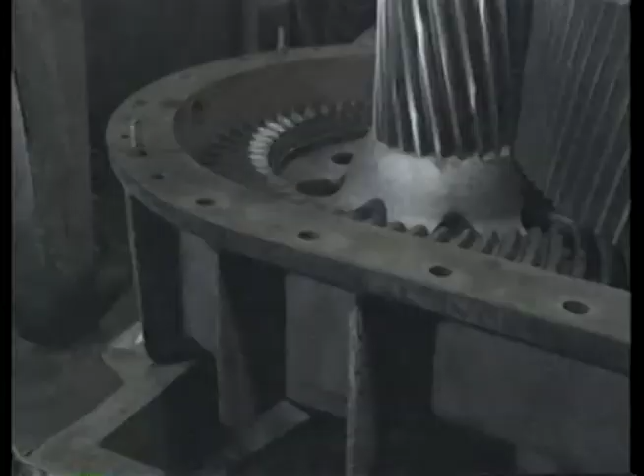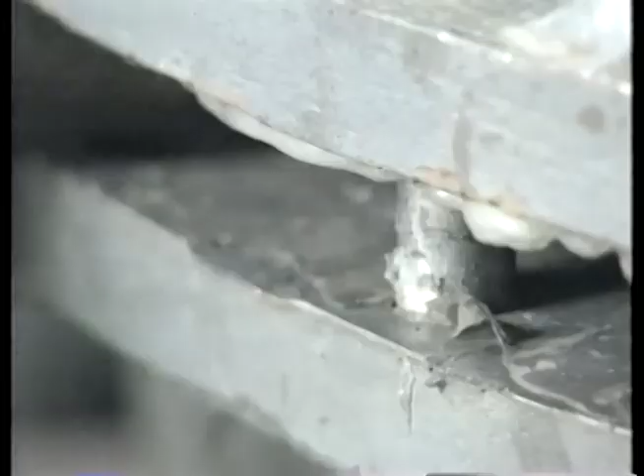...different from that required for an application, speed reducers, frequently called gearboxes or gear reducers, are often used to lower the speed. Usually the reducer or gearbox consists of a set of gears enclosed in a sturdy metal housing. The housing keeps the gear set aligned so the gear teeth mesh correctly. Correct alignment increases the life of the gearing and transmits power efficiently.

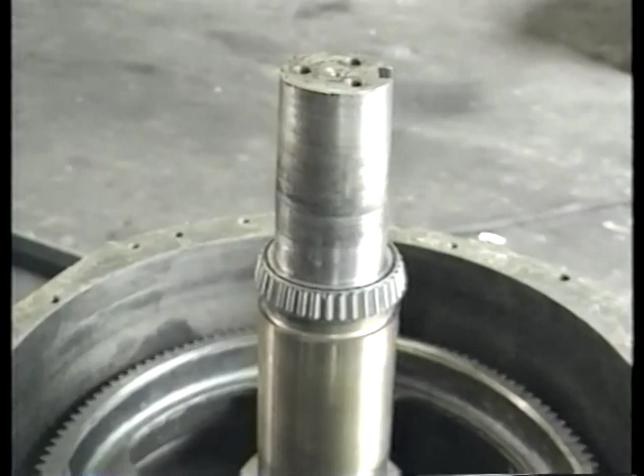The power typically comes from a motor or other driver which is coupled to the input shaft. The speed and power of the motor are transmitted through the gearing to the output shaft, either by complete reduction, in which the reducer is connected directly to the driven machine, like this, or by partial reduction, like this belt drive that further adjusts the speed.

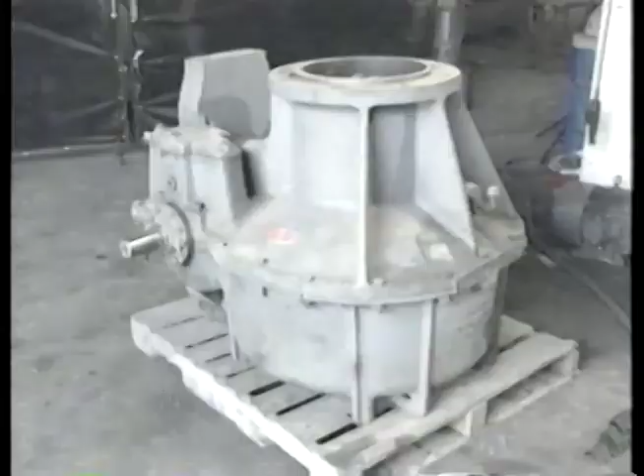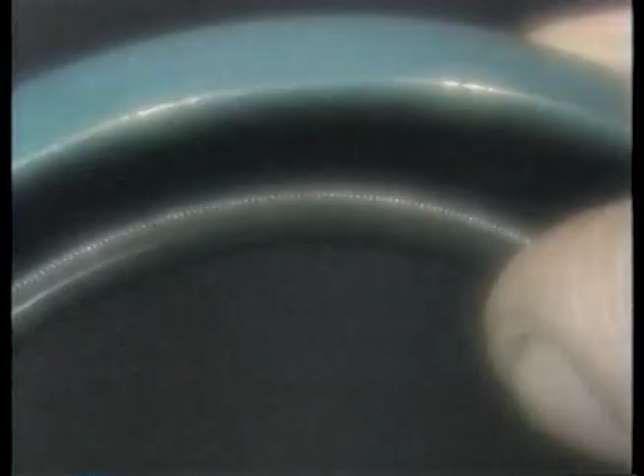Now, most reducers are basically the same, so once you know how to maintain and troubleshoot one, you'll be able to do a pretty good job with all the others you might have to work on. In this program, we'll show you the basic parts of all reducers. We'll show you some of the common things that go wrong with them. We'll show you how to spot problems early, before they become serious. We'll show you how to maximize the efficiency of the reducer and extend its life. And we'll show you what to look for during an overhaul.

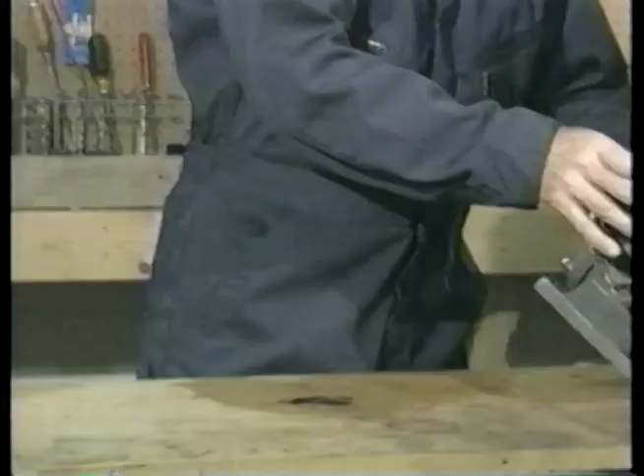Let's start with the basic parts of a common gear reducer. Here's one of the most common types, a worm gear reducer. We already mentioned the input and output shafts. These can really stick out just about anywhere, depending on the design of the reducer, what kind of gears are in it, and the application.

In terms of the input and output shaft, there are really just three kinds of reducers. The concentric or in-line reducer, in which the input and output shafts are directly in line with each other, like this. The parallel or offset shaft reducer, in which the shafts are mounted at opposite ends of the reducer. And various kinds of angle shaft reducers, like the worm reducer.

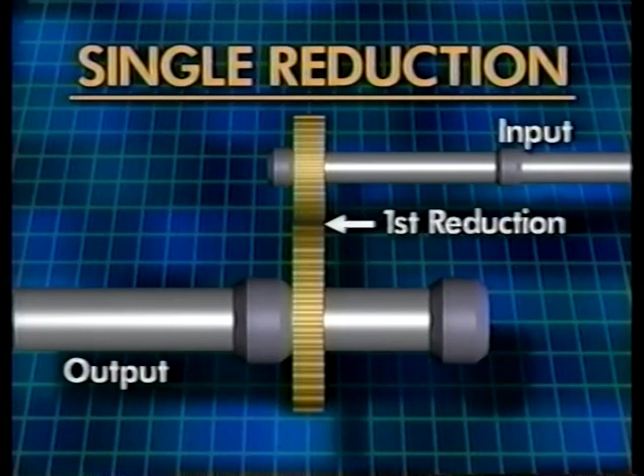However, reducers are also classified by their gear trains: single reduction, double reduction, triple reduction, and so on. In a single reduction unit, a gear on the input shaft drives a gear on the output shaft. In other reducers, the input shaft drives an intermediate gear, which may drive another intermediate gear, or the output shaft. Anything beyond a triple reduction is relatively uncommon.

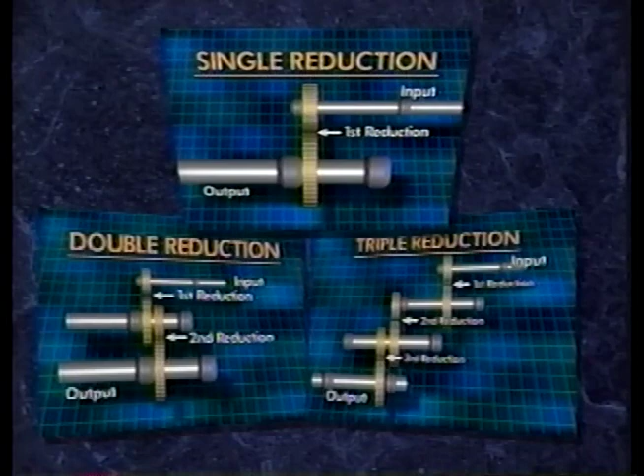Let's get back to the worm reducer. Here, the shaft of the worm is coupled to the shaft of the driver. Typically, this is done with splines on the shaft like this, or with a key and keyway like this, and sometimes with a coupling.

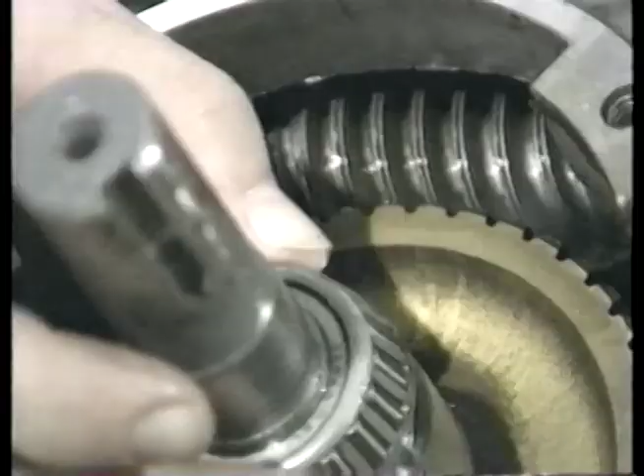When the worm turns, its teeth rotate the gear wheel fastened to the output shaft. Since this wheel is a good deal larger, its shaft rotates more slowly, usually a lot more slowly. Worm reducers are often used when there is a need to greatly reduce shaft speed. Typical input to output speed ratios on a worm reducer are at least 20-to-1 and may go as high as 3,600-to-1 or more. This means that 3,600 turns of the input shaft will turn the output shaft around just once.

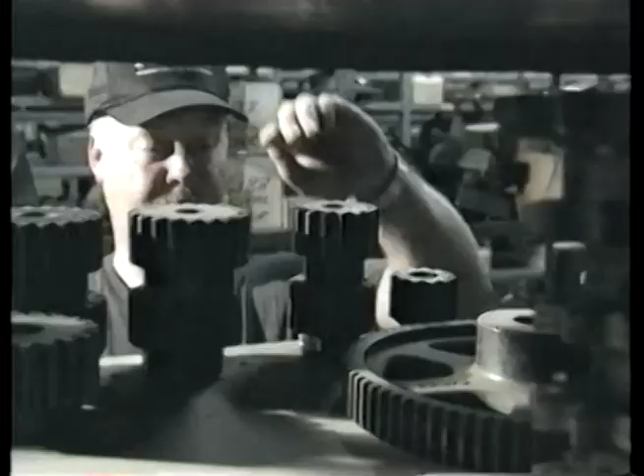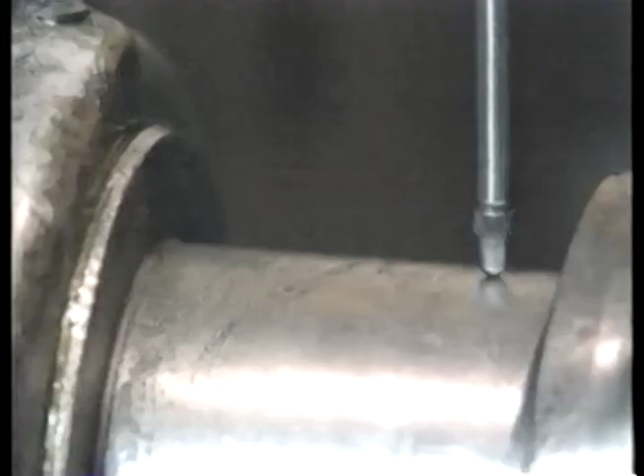Of course, different reducers will have different ratios. Many reducers are custom assembled by a manufacturer or distributor from in-stock parts to match the requirements of a particular application. Swapping out the gearing changes both speed and torque at the output shaft. Handling the high speeds and torques requires firm shaft support as well as precision shaft alignment.

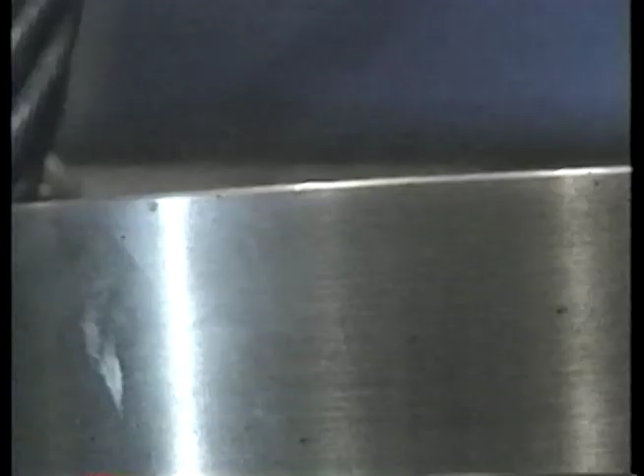Support is provided by the reducer housing, usually made of cast iron or fabricated steel, and by bearings set into the housing. Input shafts of smaller reducers are sometimes supported by ball bearings, often a bearing at each end of the shaft, but sometimes just a single bearing. Output shafts are usually supported by roller bearings. Almost always there are two bearings, one at either end of the shaft. This provides greater support for the load.

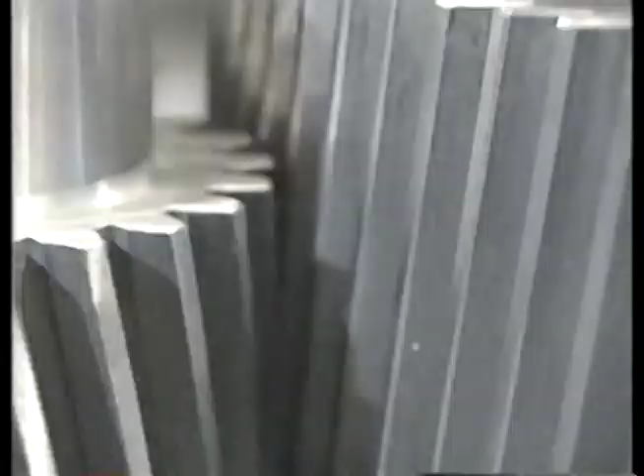Realignment of shafts within a reducer is normally done only if the reducer has been mechanically damaged, if it has been run hot enough to burn up the lubricant and seals, or if it is being overhauled and the shafts, bearings, and gears are being removed for repair or replacement.

However, the alignment of the input shaft with the driver and the alignment of the output shaft with the driven machine is critical. Misalignment will put excess load on the bearings, wearing them out much more quickly. Misalignment will increase the damage caused by shock loading, and misalignment will wear out seals rapidly, allowing lubricant to leak out and contaminants to leak in.

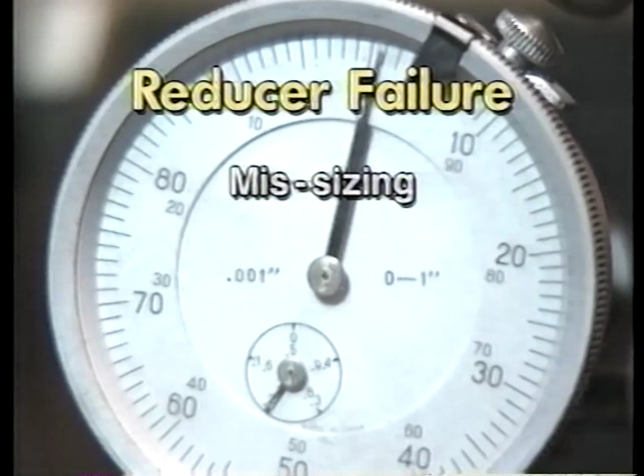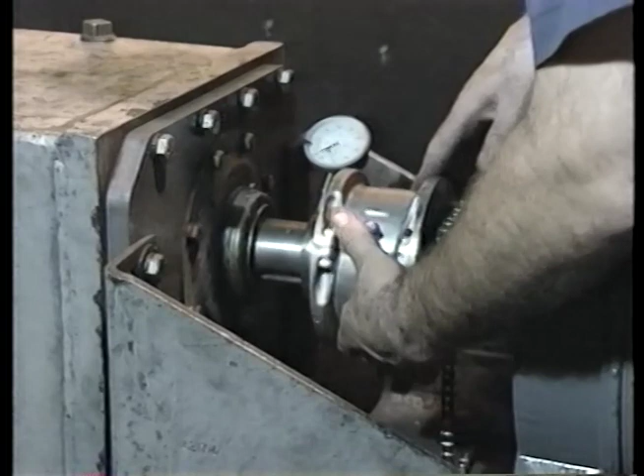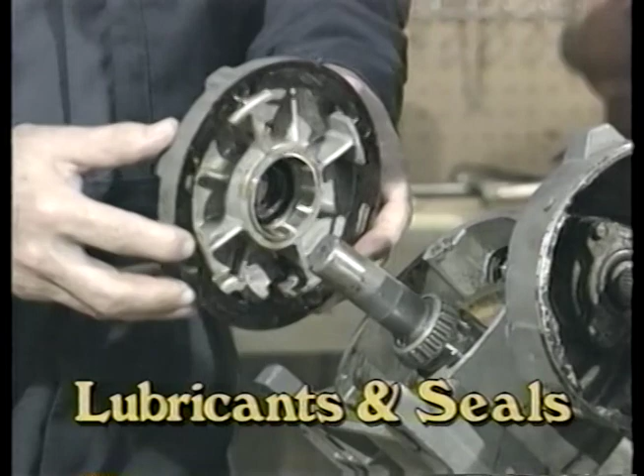But if a reducer is properly sized for its application, if it is correctly aligned, and if shock loading is kept to a minimum, then failure will almost always be the result of lubricant failure. The lubricant got too hot, it was contaminated, or a seal leaked and lubricant levels were too low for too long. We'll get to sizing a reducer for its load in a few minutes, but first, let's have a look at lubricants and seals.

Wherever a shaft penetrates the casing, a seal will be required. The seal has two purposes: to keep the lubricant in and to keep contaminants out. All seals will eventually fail, but seals that are correctly installed and properly maintained will maximize machine efficiency and minimize downtime.

The basic type of seal used in most reducers is a dual-lip, full-ring contact seal in a seal case. The inside lip of a seal usually has a small spring, a garter spring, which keeps the lip in contact with the shaft. The outer lip's resiliency keeps it in contact with the shaft. Some manufacturers also include other assemblies, like this outer seal, which can be filled with grease to block contaminants from getting to the inner seal. The seal is often held in place by a retainer.

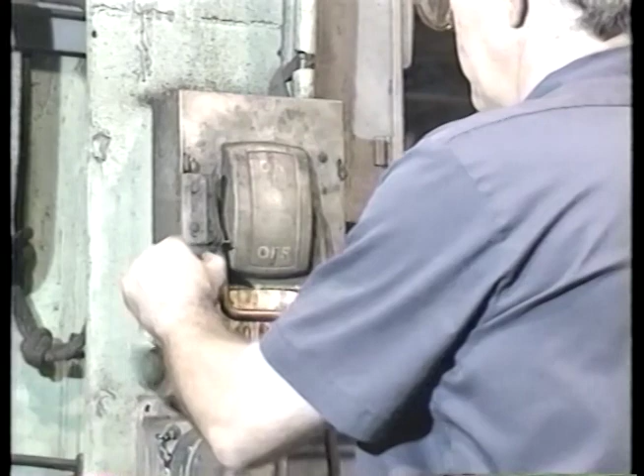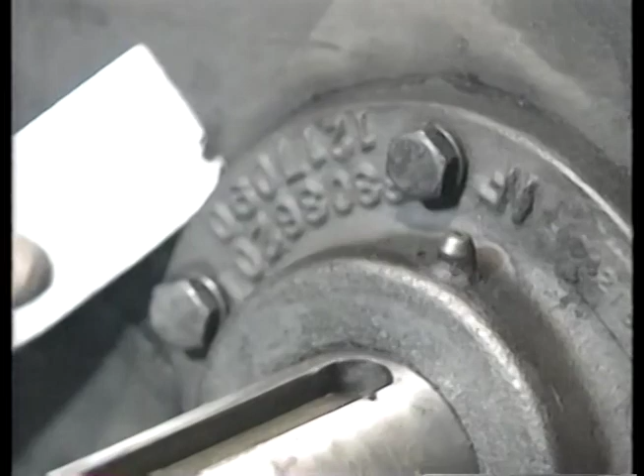Now, sometimes just the seals on a reducer are replaced, and the reducer doesn't have to be opened up. Let's see how that's done. Now, the first step when doing any maintenance on a reducer is to lock it out. Follow the established lockout procedures for the facility in which you work and for the particular piece of equipment you'll work on. After the machine is properly locked out, start by cleaning off the shaft and the outside of the reducer around the seal. This will help keep contaminants out of the reducer when the old seal is removed.

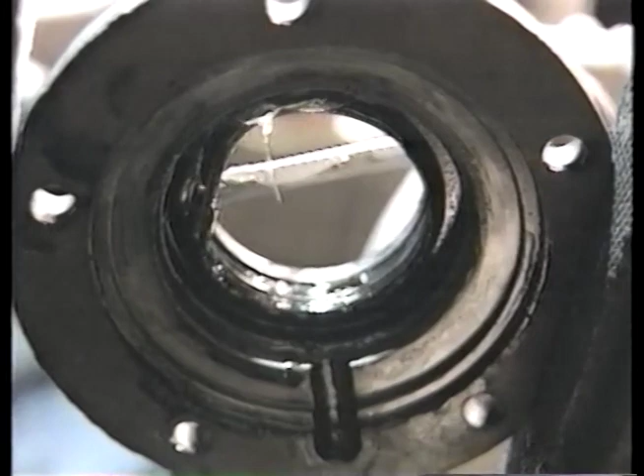Next, remove the seal cage assembly. Most seals have gaskets, and these will have to be replaced with new ones. Check the manufacturer's specifications to make sure you know which ones to use. They will have to be the same size and shape, and they will have to be of a specific thickness as well. Work carefully. If the seal cage is damaged in the process, it will have to be replaced. Do not attempt to reuse a seal cage that is bent, distorted, or scored, because the seal will probably leak. Clean the seal cage thoroughly and remove any gasketing material.

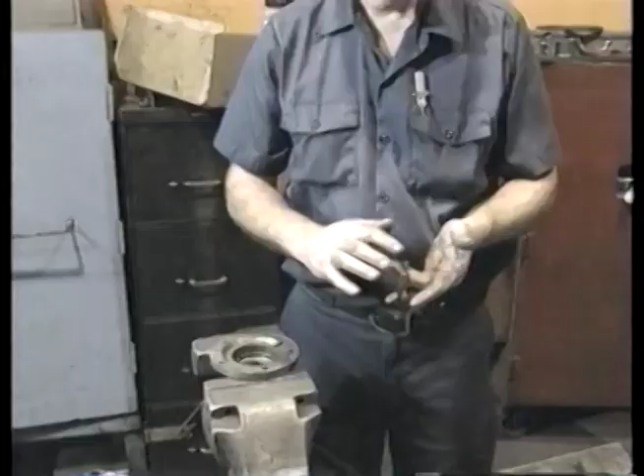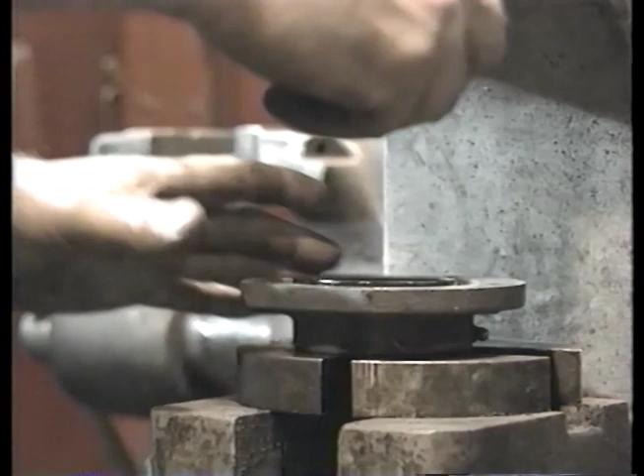Some manufacturers specify a sealing compound for coating the seal prior to installation. Follow the manufacturer's instructions, then place the seal squarely in the seal cage with the garter spring on the side of the cage that will be toward the bearing. Press or tap the seal into place by using a cylindrical tool that applies pressure evenly around the circumference of the seal case. Pressing or tapping directly on any small portion of the seal case will distort it, damaging the seal and almost certainly causing a leak once it is reinstalled.

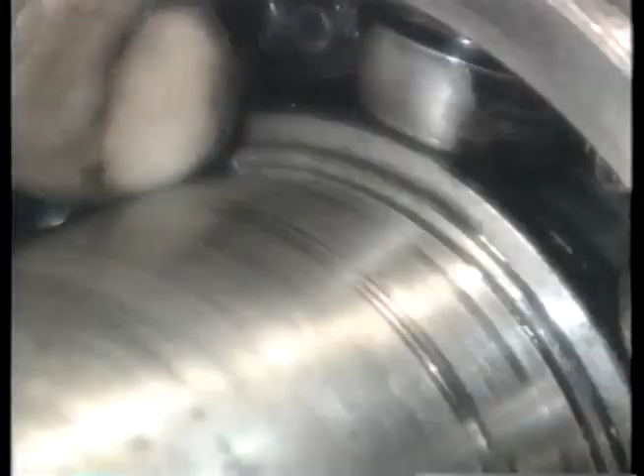Before installing the seal cage and seal, be sure to clean off the shaft and clean off the face of the reducer. When cleaning the shaft, do not scrape or use abrasive materials on the part of the shaft that has been polished by the seal. This polished section will be bounded on either side by seal paths or wear tracks. They should be very narrow, generally no more than 2/100ths of an inch, and barely felt when passing a fingernail over them. Paths that are significantly wider or deeper indicate shaft misalignment, cocked seals, or a shaft that does not run true. Failure to correct any of these conditions and failure to repair the shaft will probably result in leaks when the new seal is installed.

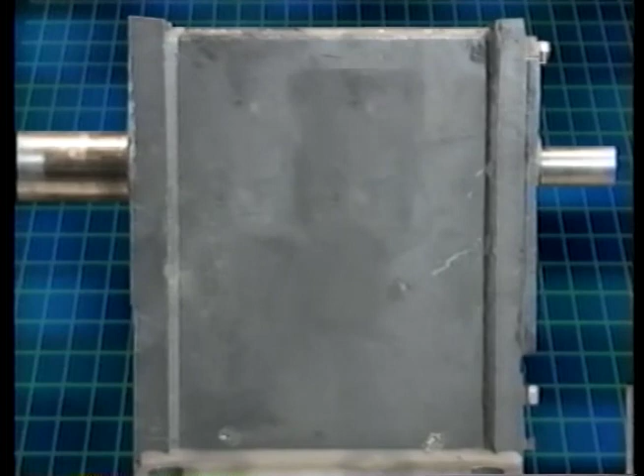When cleaning off the face of the reducer, be sure to scrape off any old gasketing and clean the surface thoroughly. The condition of the surface and the thickness of any gaskets or any shims may be critical to the proper operation of the reducer. In some cases, especially when replacing seals at the output shaft, you may have to measure and set the axial float on the shaft as well as set the preload on the bearings.

Axial float is a measure of how much the shaft will move back and forth. Typically, this is just a few thousandths of an inch. Depending on the manufacturer, it may have to be set to within a thousandth of an inch or less. A dial indicator is normally required to measure axial float accurately. Be sure to follow the procedures and specifications set forth by the manufacturer.

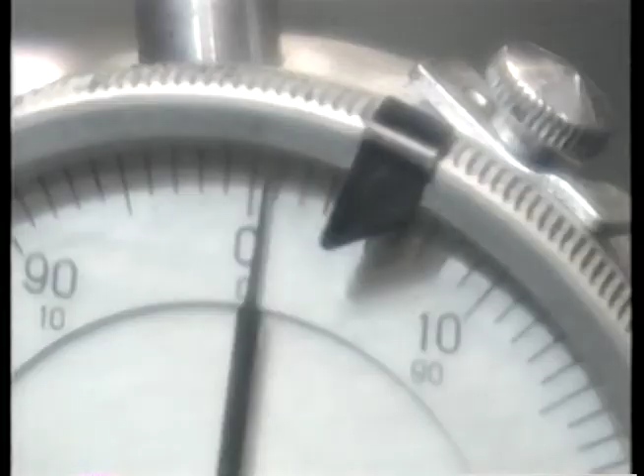Preload refers to the load placed on the bearings before any running load is added. Usually, preload is set indirectly by measuring the axial float, then varying the thickness of the gaskets and shims. Again, preloads are often set to within a thousandth of an inch or less, so a dial indicator and a copy of the manufacturer's service manual are normally required. When installing gaskets, always use new ones. In many cases, the gaskets also serve as shims.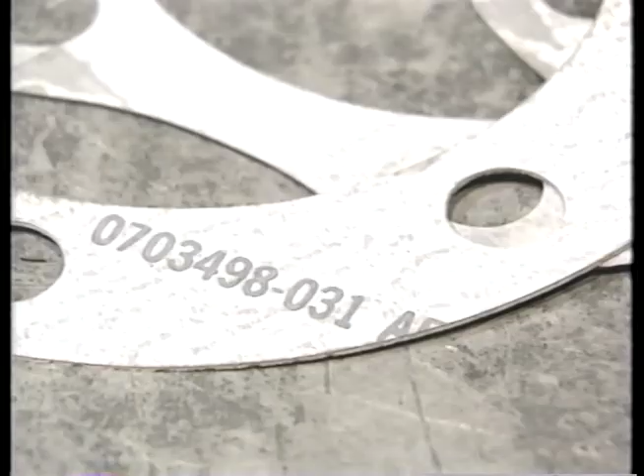Shim gaskets, as they are called, are designed to compress a specific amount when installed. Because used gaskets or shim gaskets have already been compressed, they may not provide the correct axial float, the correct preloading, or the correct alignment.

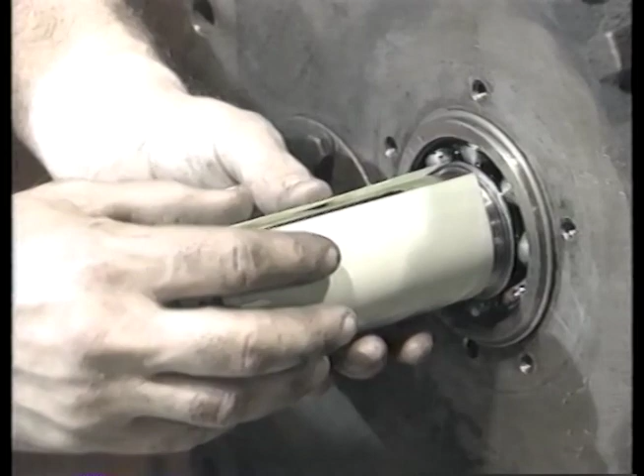With the required gasketing and shims in place, the new seal can be installed. Damage to new seals occurs most often as they are being slid over the shaft. To help prevent this, cover the shaft with thin, tough paper or plastic, then lubricate both the covering and the seal. When sliding the seal into place, be careful not to cut the seal or expand it.

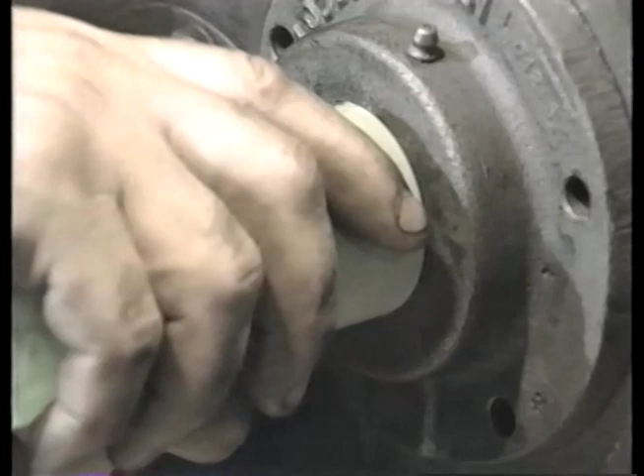Do not unseat or damage the garter spring, and do not distort the seal case. Any of these can result in a seal that leaks either at startup or soon afterward. In many cases, the seal case must be centered on the shaft, but be sure to consult the manufacturer's instructions because there may be registration marks that need to be lined up.

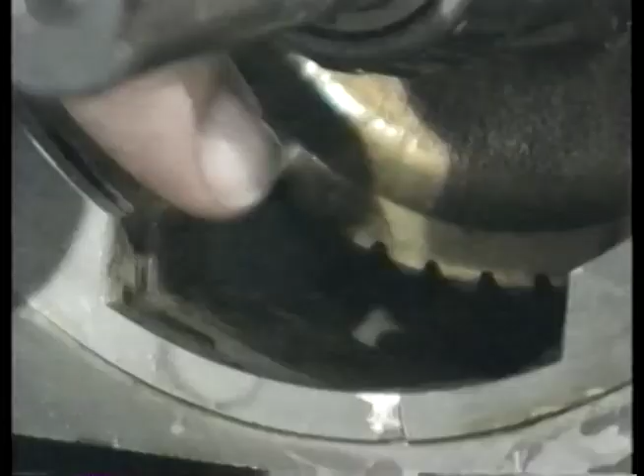As we said before, the seal keeps lubricant in the reducer, but we also said that every seal eventually fails, so every reducer eventually leaks. As that happens, lubricant levels gradually drop, and the remaining lubricant heats up and can oxidize very quickly. When this happens, bearings begin grinding and can break down quickly. And seals can become as brittle as plastic within minutes if temperatures are high enough.

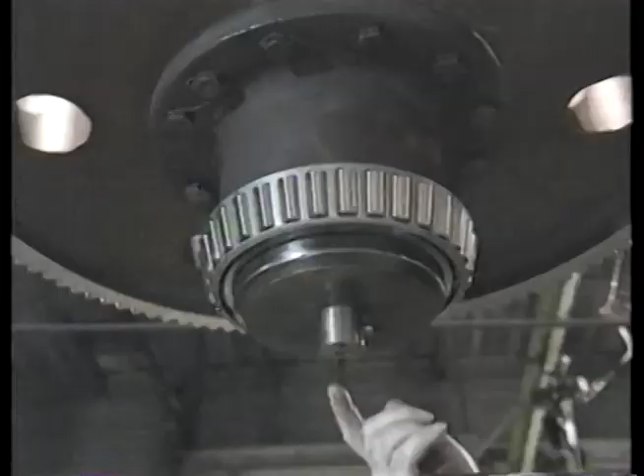Many reducers have a sump from which the lubricant circulates through the reducer. Sometimes this is done by the action of the gearing, as in this small worm reducer. But other reducers may have splash oilers, oil slingers, or other oil distribution systems. These may include pressurized oil delivery systems that pump the lubricant where it is needed. Oil pumps are often used when input or output shafts are oriented vertically. Many larger reducers include oil filters, and most have air breathers to equalize pressure and help assure oil flow.

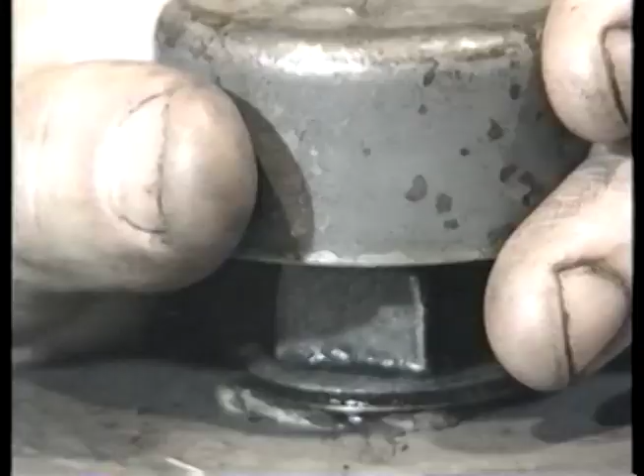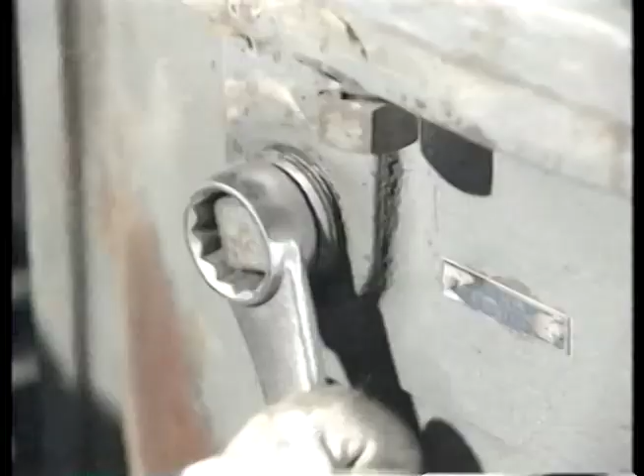Adequate lubrication is so important that most facilities have a routine program for checking lubricant levels. Many larger reducers have automotive-type dipsticks, while others have sight gauges or other oil level indicators. Smaller reducers may have an access plate or plug to check lubricant levels. If lubricant has become contaminated by dirt, grit, grime, or water, it will quickly destroy bearings and gears. The source of the contaminant should be identified and eliminated, and the lubricant should be changed. All air breathers should be checked and kept clean.

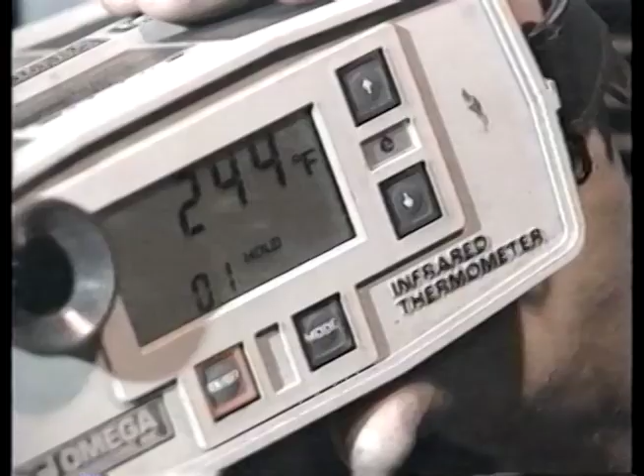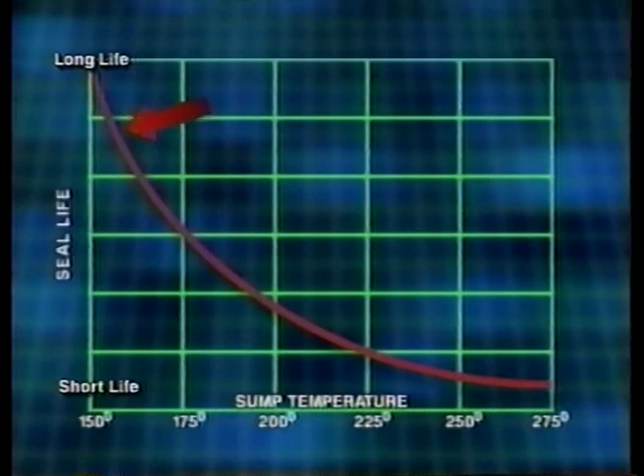Reducers that run too hot will break down more often because high temperatures degrade both the seals and the lubricant itself. Most lubricants used in reducers oxidize very rapidly above 200 degrees. Speaking roughly, seal life is halved for every 25-degree rise in temperature above 200 degrees, and doubled for every 25-degree temperature drop below 200 degrees. To extend the life of the lubricant and the seals, some reducers include a fan to help move cooler air across the radiant surface of the reducer housing. Usually, the more efficiently the reducer converts input power into output power, the less likely it is to have a fan. Many reducers have fins to help remove heat.

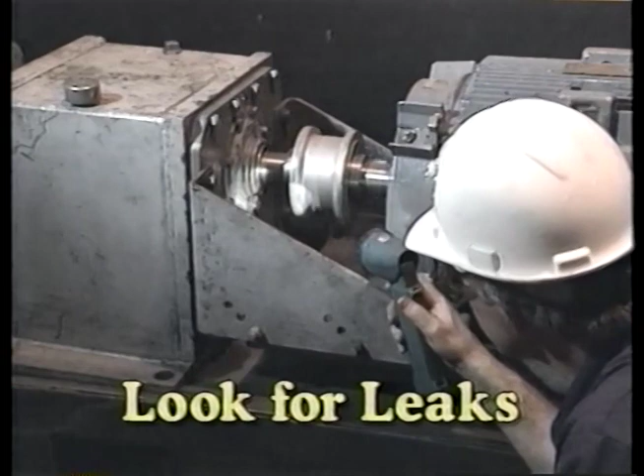Finally, be sure to check for leaks. All seals leak a little, sometimes as much as a drop or two a day, even when new. In general, a seal that leaks as much as half a dozen drops per hour should be replaced. Leaking oil not only creates a housekeeping problem, but it can be a fire hazard as well.

Okay, now we've seen the major components that all reducers have in common. We've looked at the input and output shafts, at the bearings, at how to replace a seal, and we've seen the importance of lubrication and simple maintenance routines in making sure a reducer operates reliably and efficiently. Now let's look at some non-routine maintenance, an overhaul. And while we're at it, we'll look at the main components of every reducer, the gearing.

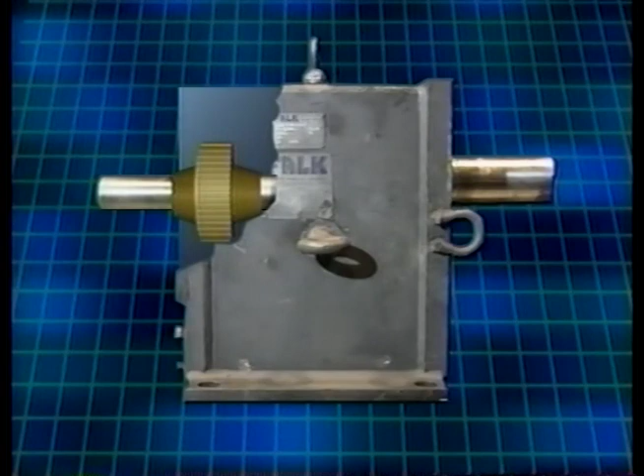As we said before, the speed and power of the motor are transmitted through the gearing to the output shaft. The type of gearing in the reducer has a lot to do with how much power is transmitted. In all cases, of course, the reducer and its gearing must be matched to the application if long, reliable service is expected. Reducers are selected for an application based first on the gear ratio. The speed of the driver is compared to the desired speed of the output shaft to determine the gear ratio required. For example, if the input speed of the driver is 3,600 RPM and the desired output is 100 RPM, then the gear ratio is 3,600 divided by 100, or 36 to 1.

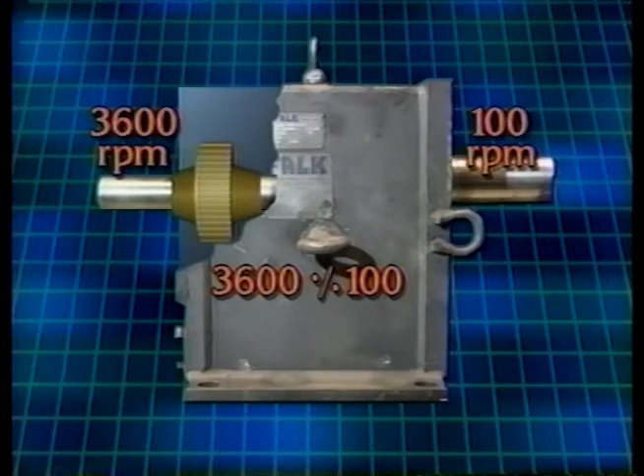In practice, manufacturers generally make standard ratios like 5 to 1, 15 to 1, 40 to 1, and so on, so the output speeds for any prime mover driving through a reducer are often decimal numbers, like 58.33 RPM for a 30 to 1 reducer operated by a 1750 RPM driver.

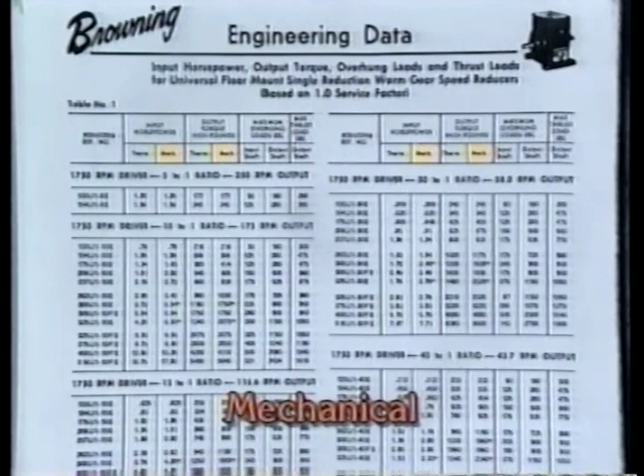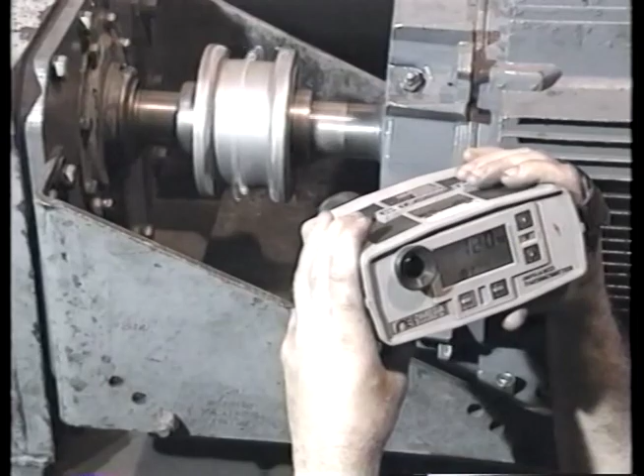After the correct ratio is chosen, reducers are generally sized by two factors. The first is a mechanical rating, usually expressed as the power a unit can transmit. In addition, it will have a thermal rating, which specifies the power a reducer can transmit without exceeding the manufacturer's recommended temperature rise. Thermal rating should always be considered carefully because, as we have seen, long-term reliable operation depends on heat and the effect of heat on seals and on lubricants.

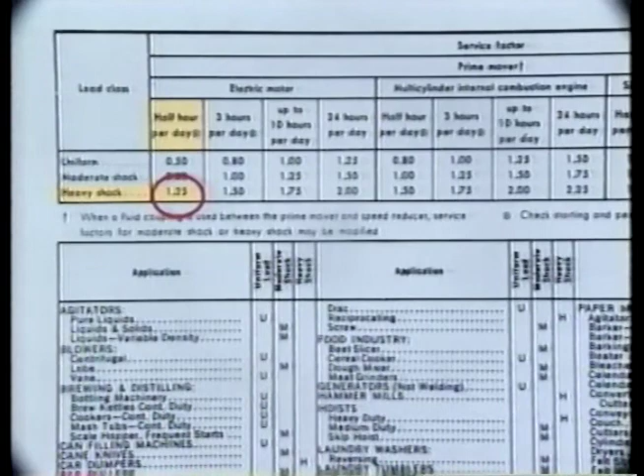For example, a hammer mill is in a heavy shock load class, and when operated 24 hours per day by an electric motor, it would have a service factor of 2.0. Operation for up to 10 hours per day would reduce the service factor to 1.75. Operation for 3 hours per day would reduce the service factor to 1.5. And operation for only a half hour per day could reduce the service factor to 1.25. Operation of the hammer mill by a multi-cylinder internal combustion engine, however, would change each of these service factors.

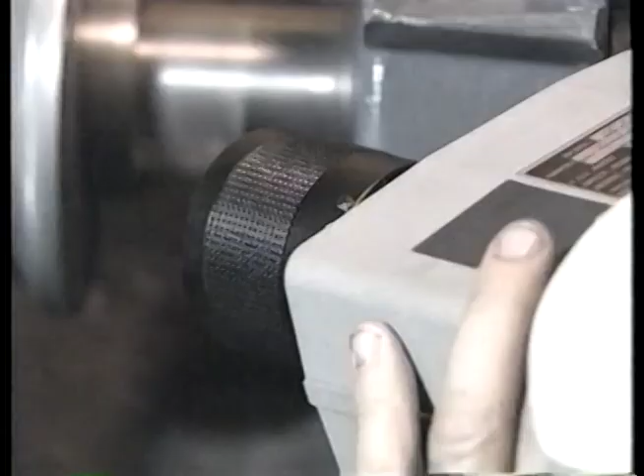The service factor is used to select an appropriate reducer. For example, if an application has 20 horsepower load with a service factor of 1.5, the reducer selected must be capable of delivering 30 horsepower without exceeding its thermal rating.

Another rating is the overload capacity. Typically, this will be 200% of the power rating. This means, for example, that the reducer can handle a temporary overload twice as large as its rating. The overload, however, must be applied only intermittently. Usually, this means no more than a few times during any 10 hours of operation.

The third rating is the maximum overhung load. This refers to how much weight the input and output shafts must carry as a result of the driver and the driven load. Exceeding the maximum overhung capacity will damage the reducer.

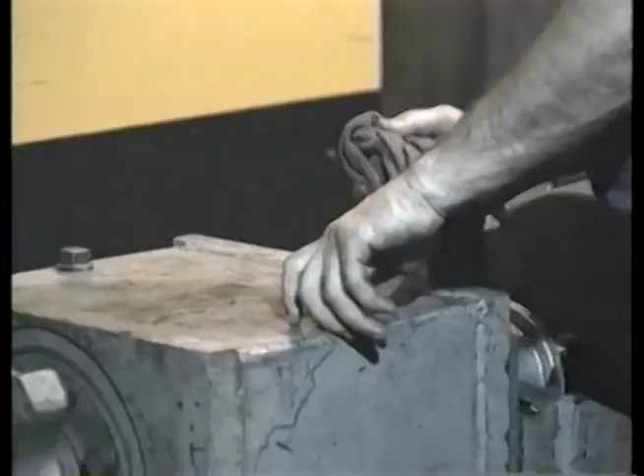Usually, it's not difficult to spot a misapplied reducer. It'll run hot. Its lubricant will require frequent replenishment and frequent changing. Seals and bearings will wear out quickly. And the gear teeth will probably be damaged. A close examination of the gear teeth can tell you a lot. The most common problems are pitting of the tooth surface and fatigue cracks at the root of the gear teeth. Gears are rated based on how badly they pit and how easily they crack.

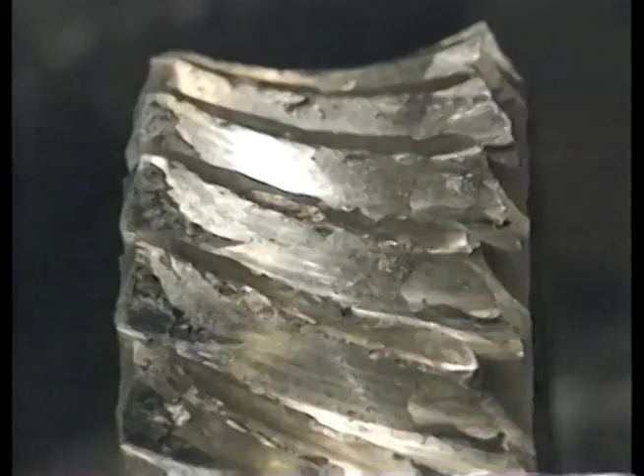If the reducer is not being opened up for an overhaul, castings or prints of the teeth can sometimes be made. An analysis of these prints can often pinpoint operating problems long before they become serious. Of course, if you're overhauling a reducer, you'll be able to take a good close look at all the gears. Some types of wear obviously mean trouble. These teeth were badly bent, and some even stripped off. The gearbox was seriously overloaded, far in excess of its rating.

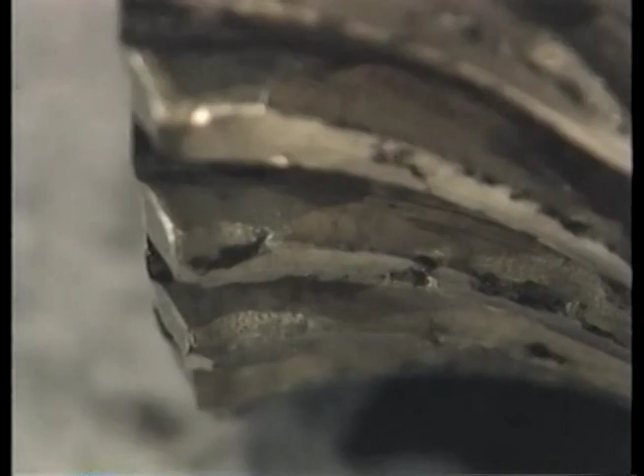However, problems like this are usually preceded by signs of failure. When gearing is greatly overloaded, or when it is repeatedly overloaded to a lesser extent, it will often develop cracks at the base of the teeth. In general, you can expect that the life of a gear will be reduced by a factor of 8 if the full load is doubled. This means gearing that might have run reliably for 25,000 hours may break down in about 3,000 hours.

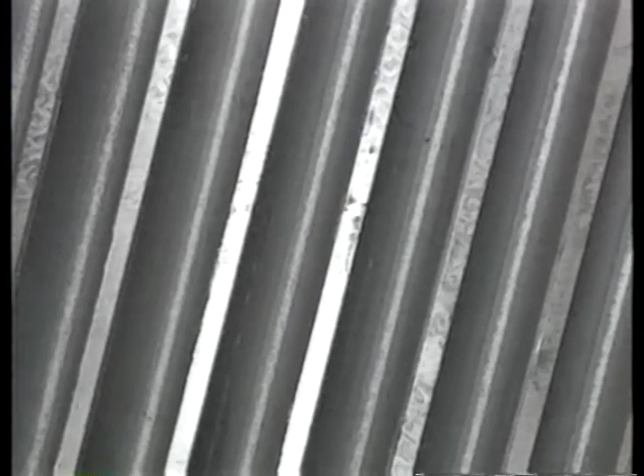Now, not all obvious wear is bad. There is a kind of normal wear that occurs when gears are operated at or near full load. The pattern of wear appears in the dedendum, below the midpoint of the tooth. It's called pitting, and it looks like a lot of small pits or holes in the surface of the tooth. If the pits remain shallow, and if they are all in the dedendum, and if the edges of the pits gradually wear down, then this kind of wear is considered normal.

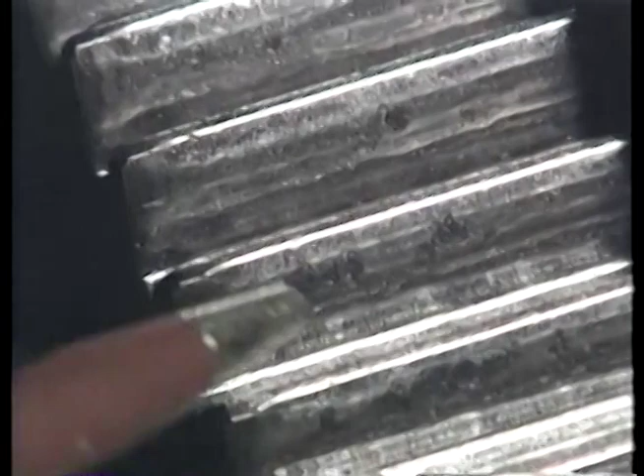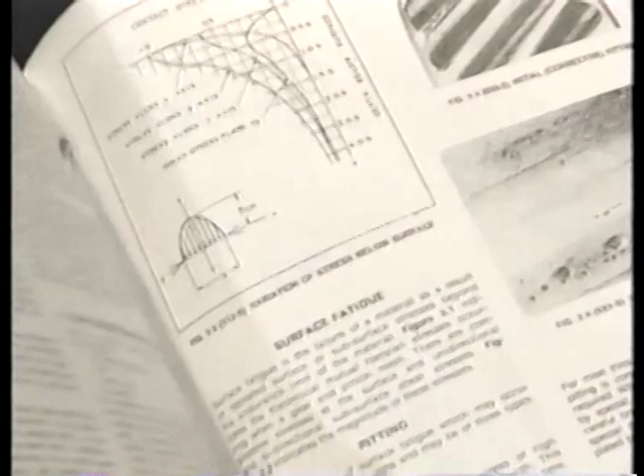However, if the pits get deeper, or if the pitting extends beyond the dedendum, or if the edges of the pits do not wear down, then destructive pitting is occurring. The gear is on its way to failure, usually fairly quickly. Many other kinds of wear can occur, and all of them can tell you a lot about what's going on in the reducer. When overhauling a reducer, it is often worthwhile to compare gearing with descriptions of known kinds of wear to determine what may be going wrong.

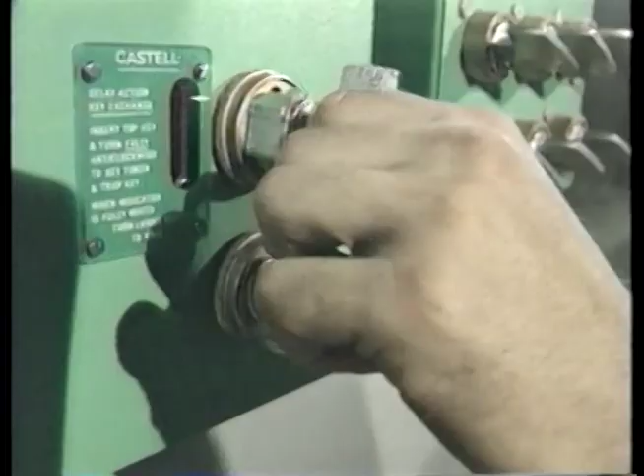Standard descriptions and photographs of common wear patterns are available from many manufacturers and from AGMA. Now, before you start removing a reducer for an overhaul, there's always one thing to do first: lock it out. As we said before, follow the established lockout procedures for the facility in which you work and for the particular piece of equipment you'll work on.

The next thing to do is make sure you keep the manufacturer's service manual handy. Do not attempt to overhaul a reducer without it. Very often, specific sequences must be followed during disassembly and during reassembly in order to prevent component damage and to assure correct operation. Start by cleaning off the reducer as best you can. The cleaner it is before you break loose any bolts, the less chance there will be to get dirt and grime in the housing, on the gearing, and in the bearings.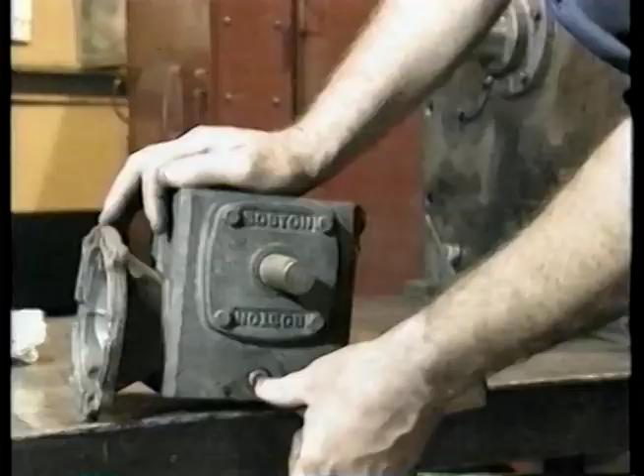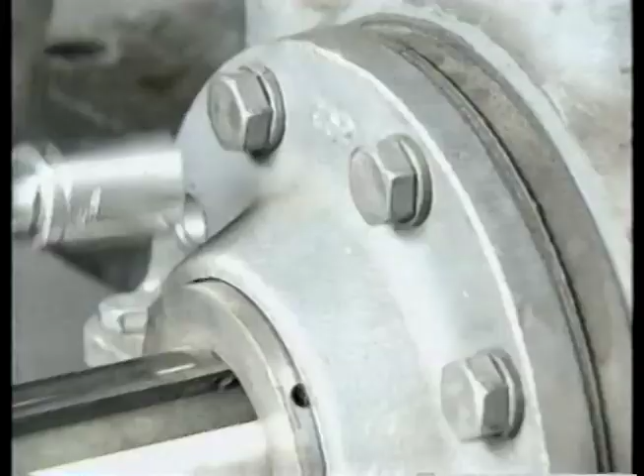On small reducers, you'll want to drain the oil first, before disassembling the housing. On larger reducers, the cover can usually be removed first. Be sure to consult the manufacturer's service manual for the proper procedures about how this is done. For example, some reducers have dowels that must be removed, while others do not. Some bolts should never be removed, or only loosened, while others must be removed entirely. On some reducers, bolts below the housing split should be loosened but left in place. It's good practice to wire shims and shim gaskets in place to keep track of them for later replacement.

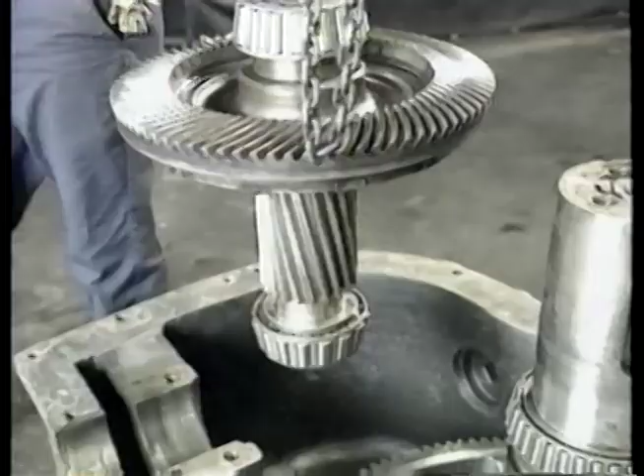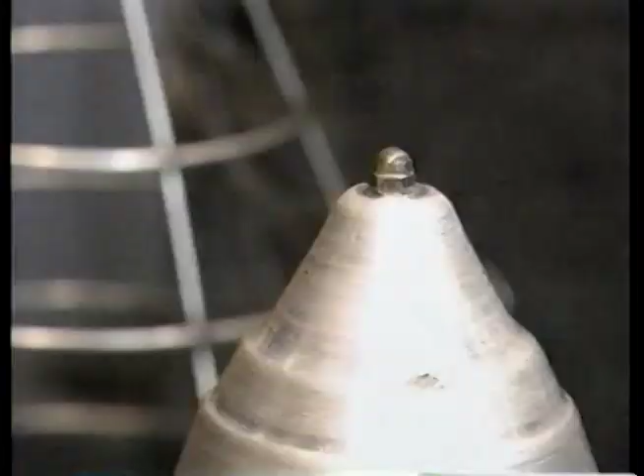In most reducers, the gearing and shafts must be removed in a specific order. The high-speed input shaft and gearing, then the intermediate gears, if it is a multiple reduction unit, then the low-speed output shaft and gearing. It is critical to hoist the gearing straight up. Gear teeth are easily damaged if they bump against each other. Normally, you'll replace all the seals, and you'll replace all the bearings for the shafts that have been removed. Use the correct tools when working with bearings: a bearing puller to remove them, a controlled heat source to expand the new replacements. Clean the air breather and clean or replace the filter if there is one.

Clean the inside of the housing thoroughly and clean the oil pans, troughs, and any other lubricant distribution systems. Use approved solvents. Carefully examine the shafts and gearing for signs of damage. Damage to the gear teeth other than normal pitting usually calls for replacement of the gear. In some cases, this will mean replacement of the shaft as well, because some gears, especially small pinion gears on a high-speed shaft, cannot be removed without destroying them. Check the shafts, especially for seal wear paths that are too wide or too deep. This is a common cause of leaking seals. Shafts with pronounced wear paths should be resurfaced or replaced. Sometimes, shafts can be adjusted during reinstallation so that the seal rides on a new section of the shaft.

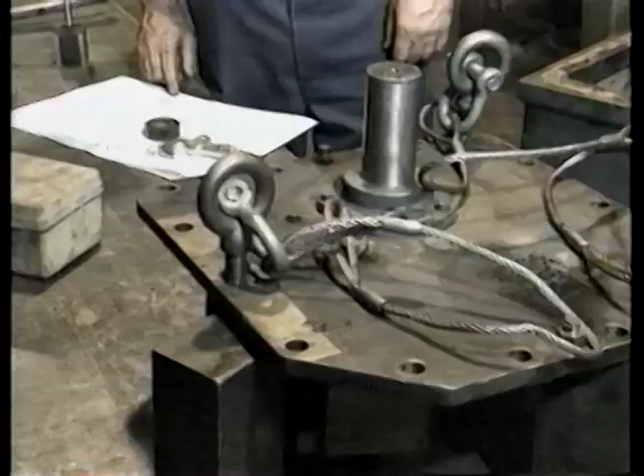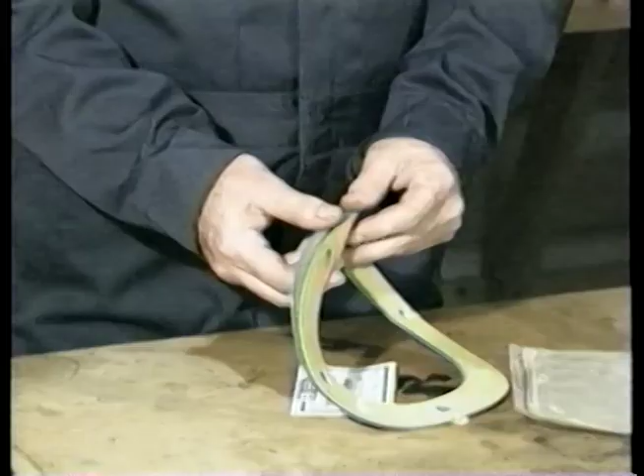When reassembling a reducer's gearings, shafts, and the housing, be sure to follow the manufacturer's specifications for correct tightening. Failure to achieve the proper torque for lock nuts and cover bolts, or to follow other instructions for tightening, could result in serious damage to the reducer during operation. Use a properly calibrated torque wrench and an impact wrench if required. During reassembly, be sure to read and follow the manufacturer's instructions carefully. Often the axial float of bearings will have to be set, typically to within a couple thousandths of an inch. All shim gaskets and gaskets should be replaced.

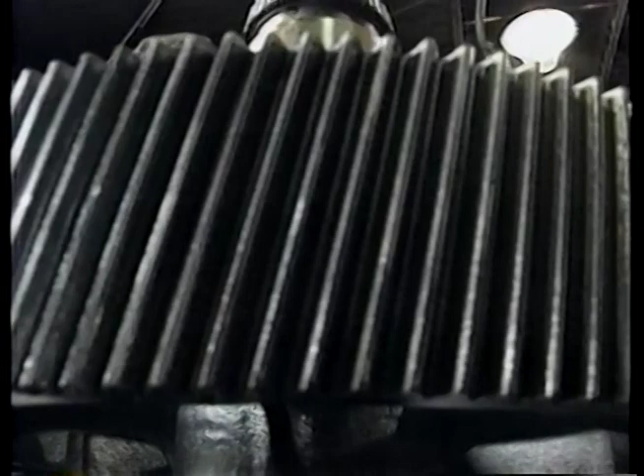Reassembly should be done in the reverse order. Generally, the low-speed output gearing and shaft, followed by any intermediate gearing, and finally, the high-speed input gearing and shaft. Do not bump the gears together. Again, refer to the manufacturer's service manual. If shafts are being reversed or replaced or offset, you may have to switch oil pans and troughs around, or you may have to rewire the motor.

Finally, add the cover gasket if there is one, or coat the top of the base split with a sealant. Then lower the cover into place and tighten all bolts to the specified torque. Recheck the axial float of each shaft. Turn the gear train by hand. Then add lubricant to specifications. Overhauled reducers should run without a load for an extended period of time, while temperature and oil levels are checked periodically.

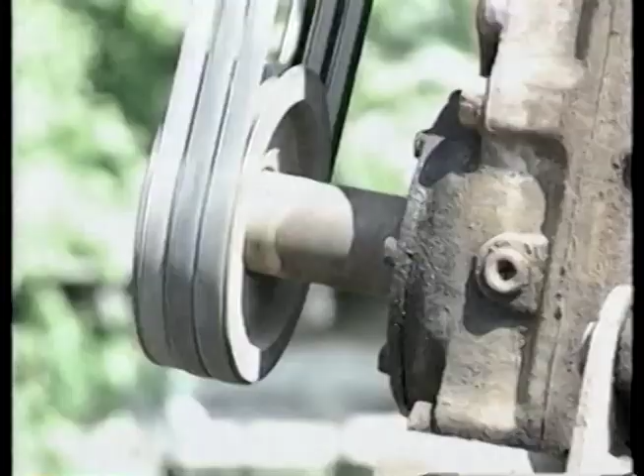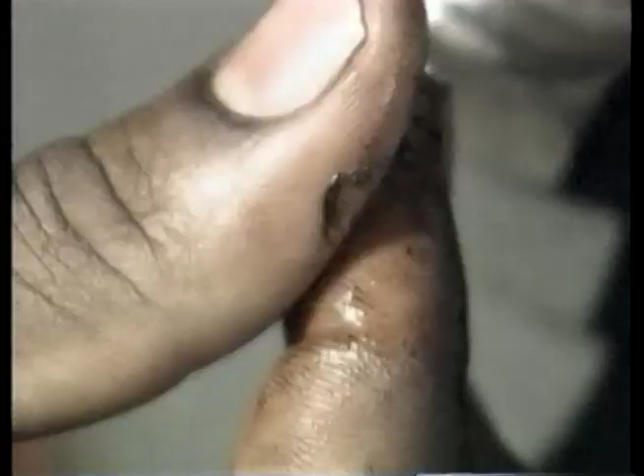In this program, we've shown you the basic parts that all reducers have in common: shafts and seals, bearings and gears. We've shown you some of the common things that go wrong with reducers and how to spot them early. If you follow the basic maintenance guidelines in this program, you'll be able to maximize the efficiency of the reducers you work with. You'll be able to get them back up and running again quickly when things do go wrong. And you'll be able to keep them working reliably for a long time.